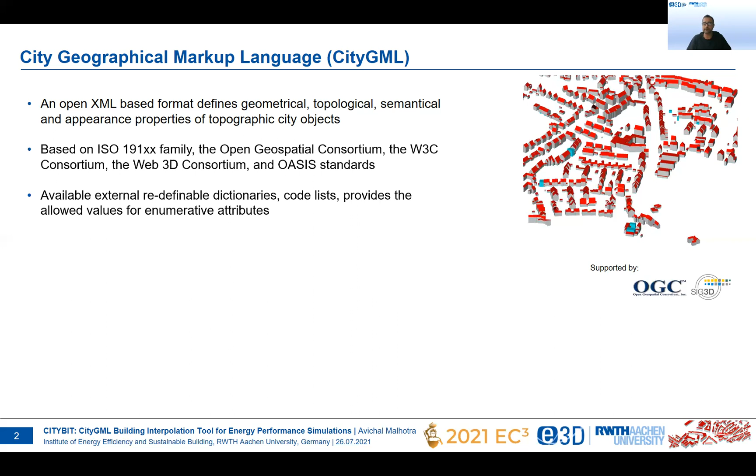There are many different available external redefinable dictionaries and code lists that provide the allowed values for different attributes. For example, the different roof types, or it could be the different building usages. These things can be defined in multiple code lists, depending upon the detailing.

Models can be defined over 5 levels of detail, starting from level of detail 0, where you just have the base model, level of detail 1, which is basically an extrusion of the LOD0 model, LOD2, where you have the different roof surfaces as well, level of detail 3, where you even have the window properties, as well as level of detail 4, which contains the city furniture as well as the other attributes of the different buildings.

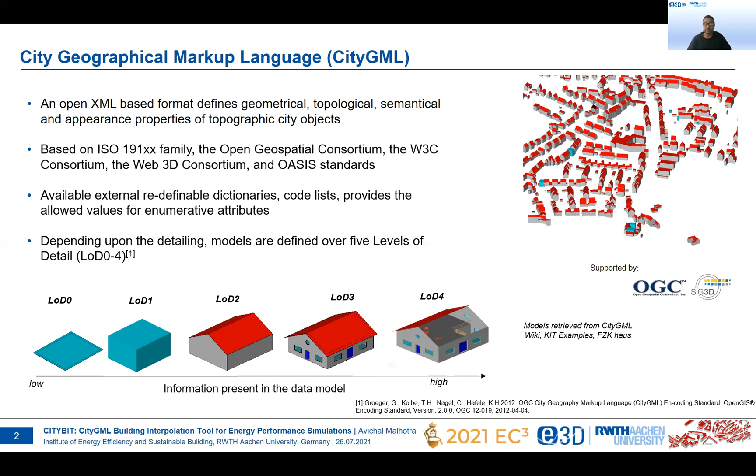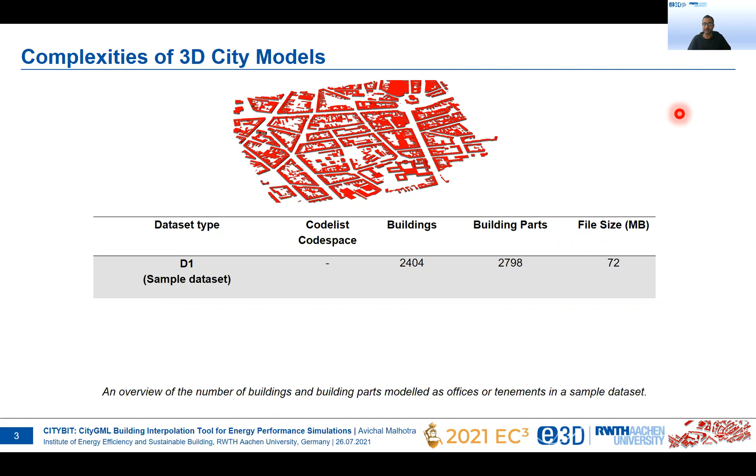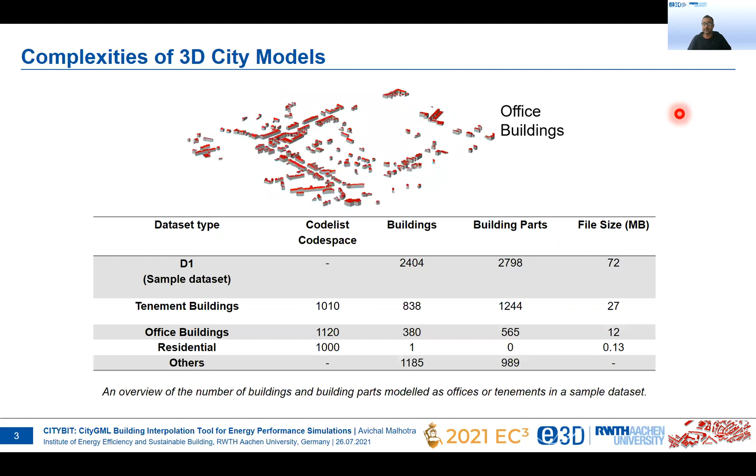As CityGML datasets are really complex, it's huge. So we try to sample out a small dataset which could be identified as a small city quarter, which we try to analyze and see how many buildings are there, how many building parts are there. So for example, in the dataset we selected, there were in total almost 2,400 buildings, as well as 2,700 building parts. But when we look closely, there are in total 838 buildings which are defined as tenement building, as well as 380 buildings, as well as one residential building.

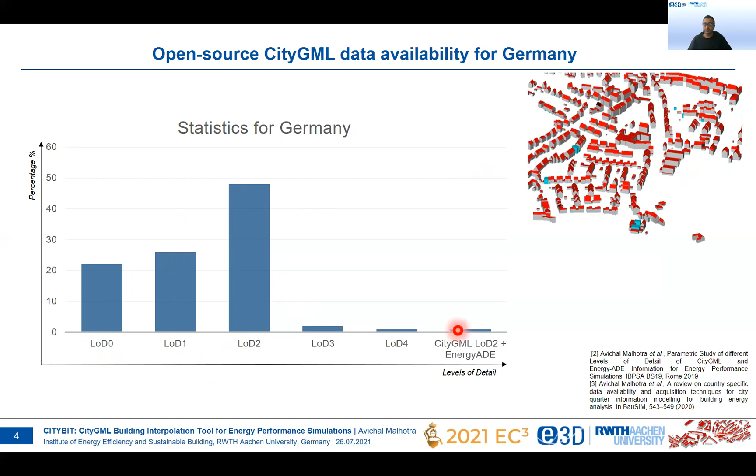If I just talk about Germany, because I take the data sets from Germany, almost 20% of the data models which are openly available are in level of detail 0, which is just the base model. Almost 30% or 25% are available in level of detail 1. But the most commonly available open source CityGML data model is in level of detail 2. And this is why we created the tool CityBIT, in order to develop new CityGML models in level of detail 2.

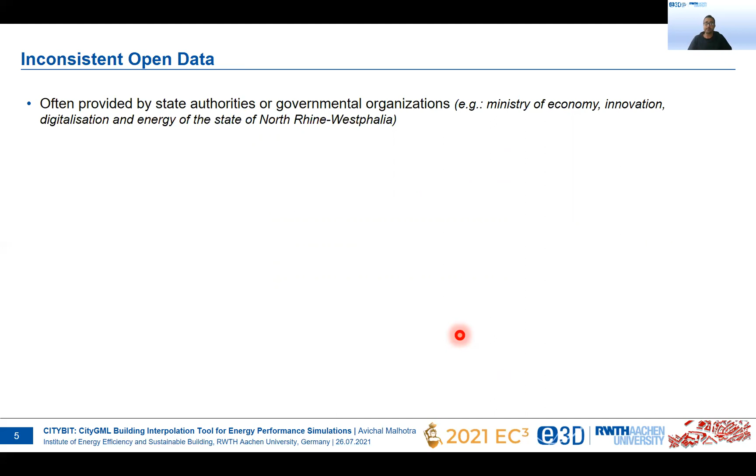There's again one problem we often face when we are talking about open data. Many times it's inconsistent. Often it is provided by state authorities or governmental organizations. The update schedules lead to multiple discrepancies between the models and the building. For example, if we look at the CityGML model from 2018, there's a building which is defined there. In 2019, the building is not even defined inside.

Yes, that's the true status of the building today. But if you compare to Google, the building is still there. If you compare to ESRI GIS visualization, it's not there, and in OpenStreetMap, it's still there. So there's a lot of confusion and a lot of different discrepancies that people find in open data sets. How do we overcome that? How do we overcome the problem of creating new building models when we want to simulate them?

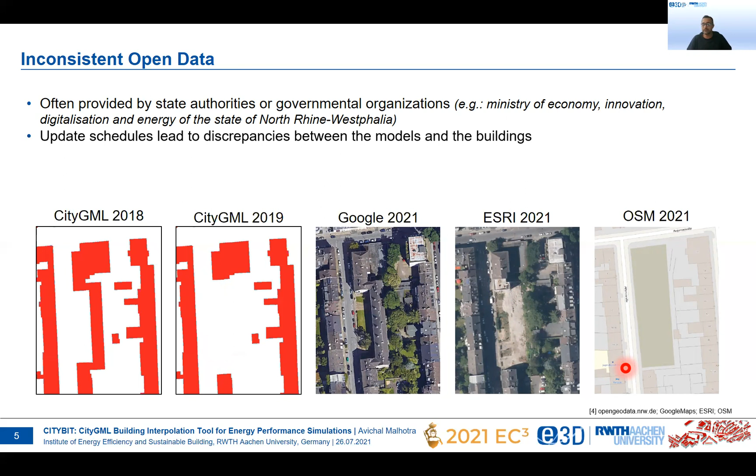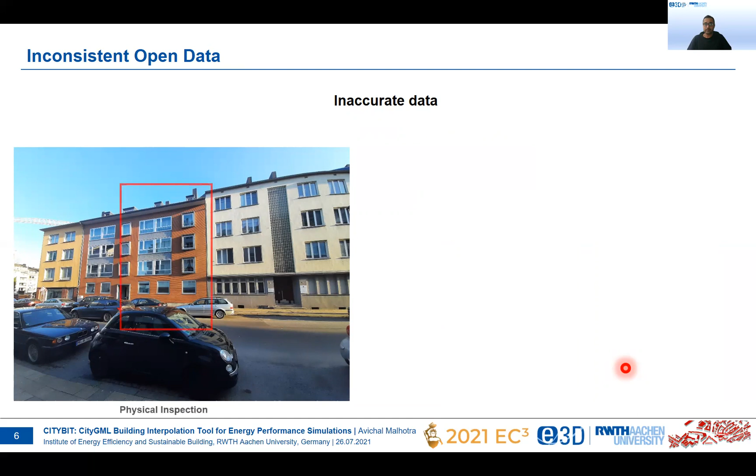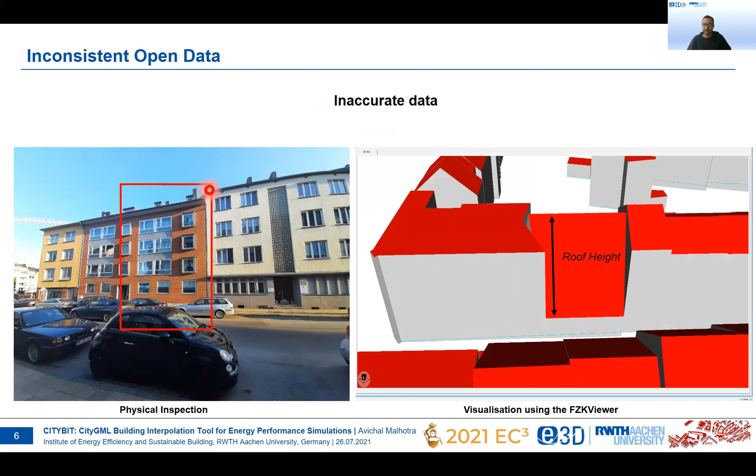Again, there's some data which is inconsistent in context of open data. We take an example building. To be very frank, it's near my house. So we physically went there, checked out the building, and compared it to the building model we have. So you see on the left figure, the physical appearance of the building seems to be fine, just like the other ones. But in the CityGML models, the roof is almost closer to the ground.

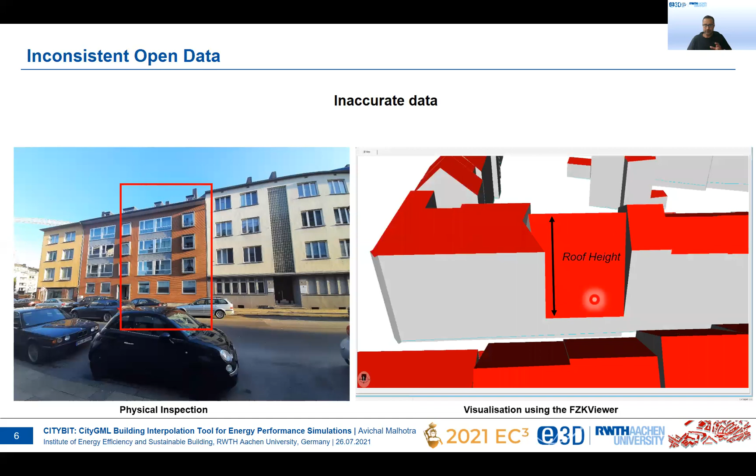To have a bigger picture, to look at a bigger data set, we analyzed the data set in Aachen. So in the data set, we see the different discrepancies between the different modeling years in context of number of buildings, number of building parts, the coordinate reference system, the level of detail, as well as the CityGML version.

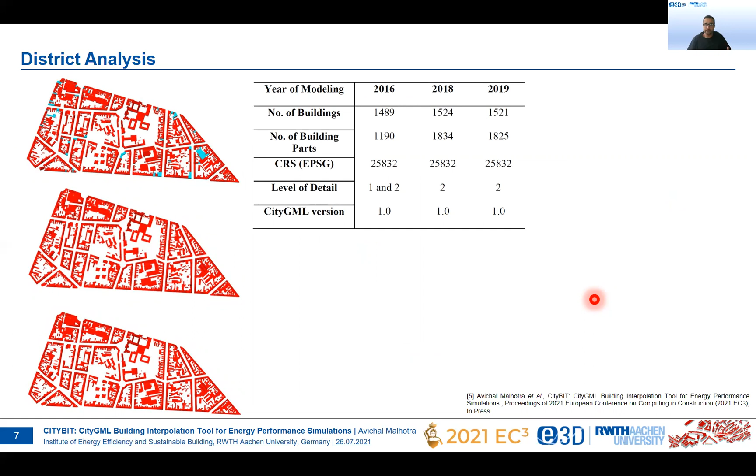One thing which is important in context of building models is the roof surface, because that is normally taken into account when you're calculating the volume of the building for energy simulations. So in this data set, almost 1500 buildings were with a flat roof, 939 buildings were defined as gabled roof, which is most common here. If I look at a bigger picture in the whole city, I would say flat roof and gabled roof are the most common roof types which are available.

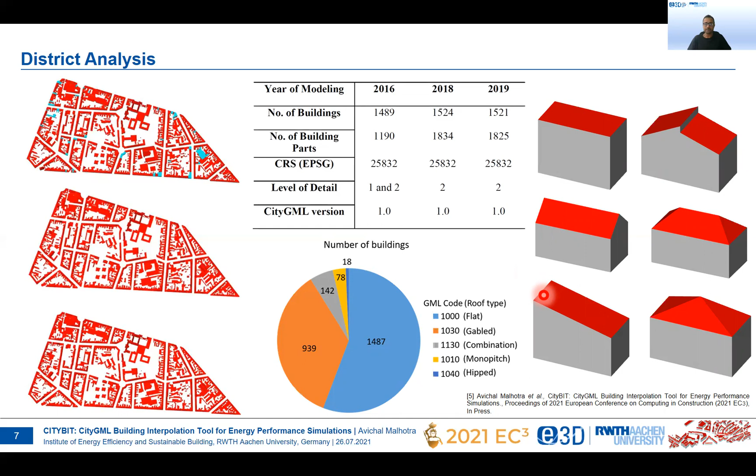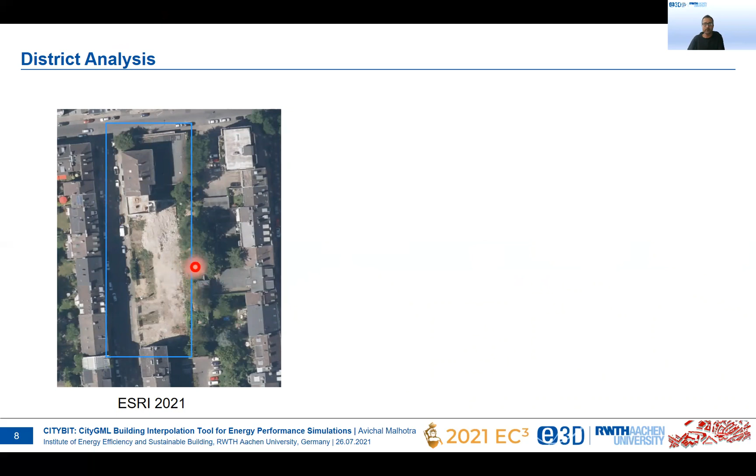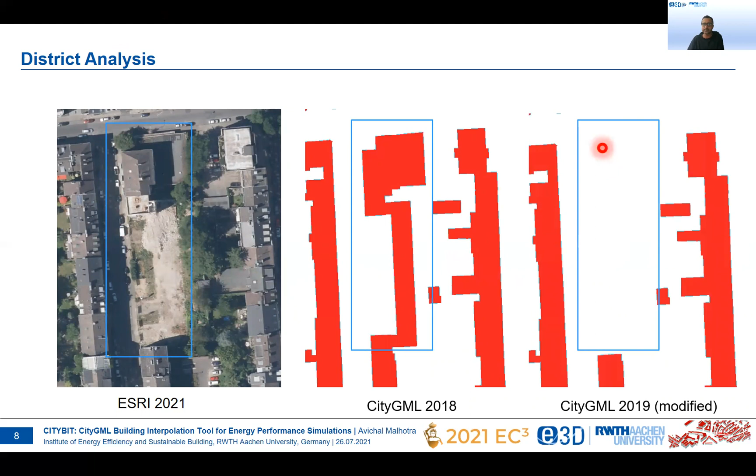Looking closer, we again selected the same example I showed you before, because we can physically inspect that place. We can go there and see how the actual land looked like. So we selected this particular part, which is highlighted in blue here. From 2018, as I previously mentioned, the CityGML model did contain the building there. From 2019, there was just a small part, but we modified it for a better building creation using the tool.

We even contacted the architects who are building this particular building block, and we were lucky enough to get the site plan. We tried to overlay it with the CityGML model in order to see how exactly we can create the models, so create enough of the basis.

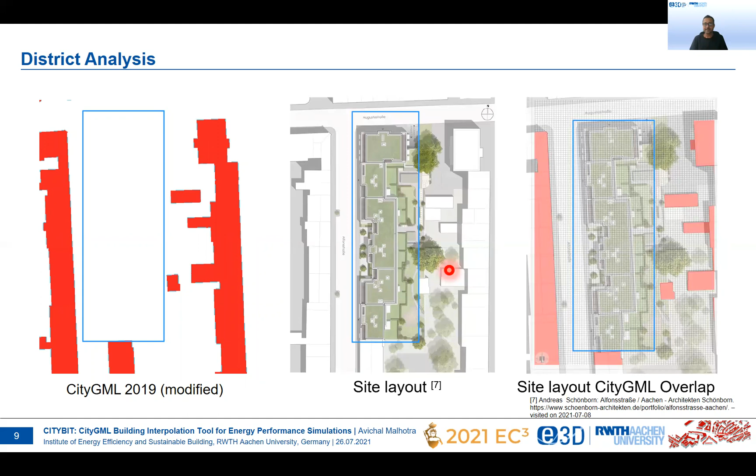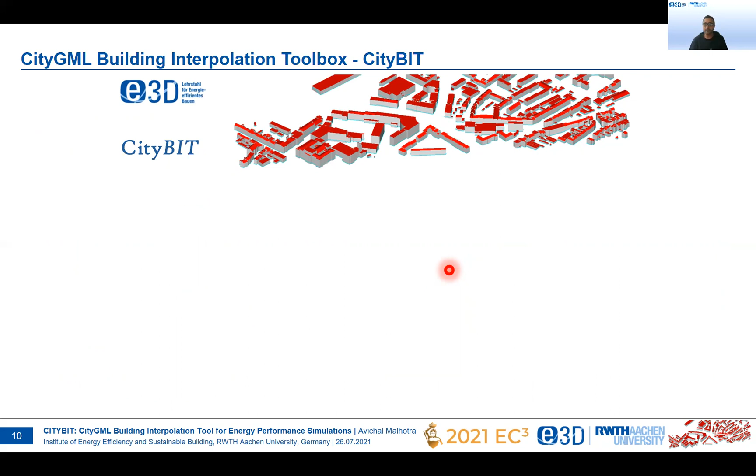Now I go to the tool. This is the main reason why we created the tool CityBIT, which is a CityGML Building Interpolation Tool. Now the question is, how can we create city building models? How can we create 3D models? How can we simulate them when even the data is not existing? So there are two ways to do it. One is to use manual inputs, which I'll be explaining in the next slides, as well as the interpolation methods. It could be done on the number of buildings, radius, polygon border. Again, I'll be explaining this in the next slides.

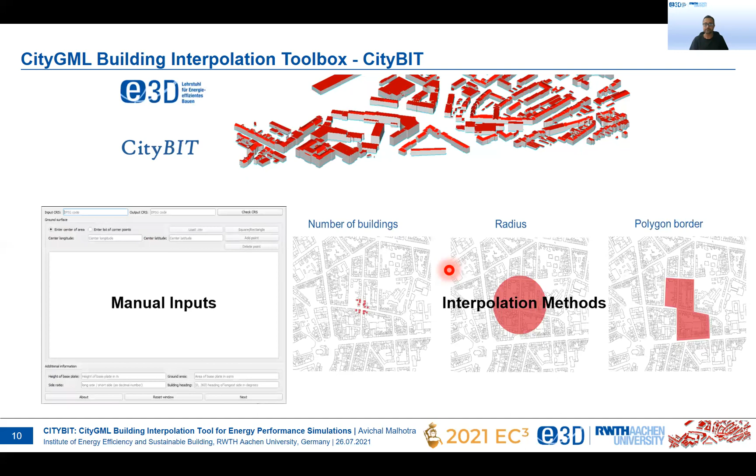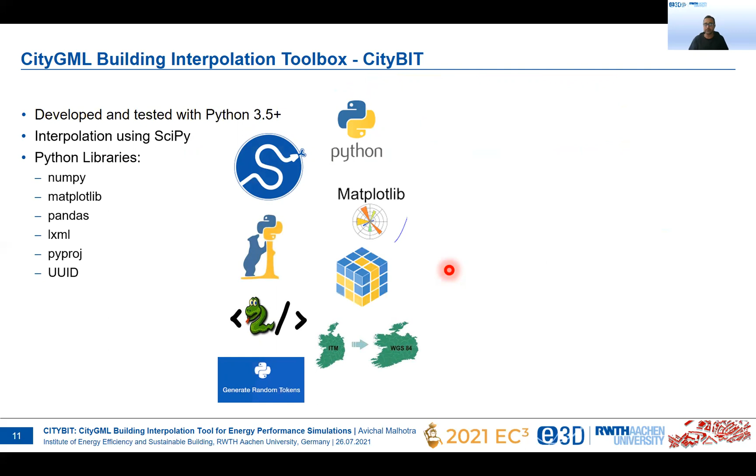CityBIT is developed and tested using Python 3. The interpolations which we use are using SciPy. The other libraries are, for example, NumPy, Matplotlib for plotting, Pandas, LXML, PyProj, which is again a library in Python which you can use to transfer the coordinate reference system from one zone to another, and UUID, which creates a new unique identifier for the individual buildings, and the main graphical user interface, which is easier for the user, using PySide2.

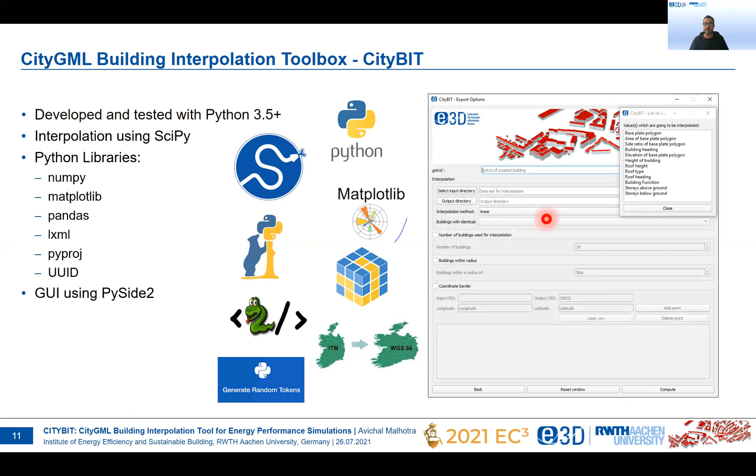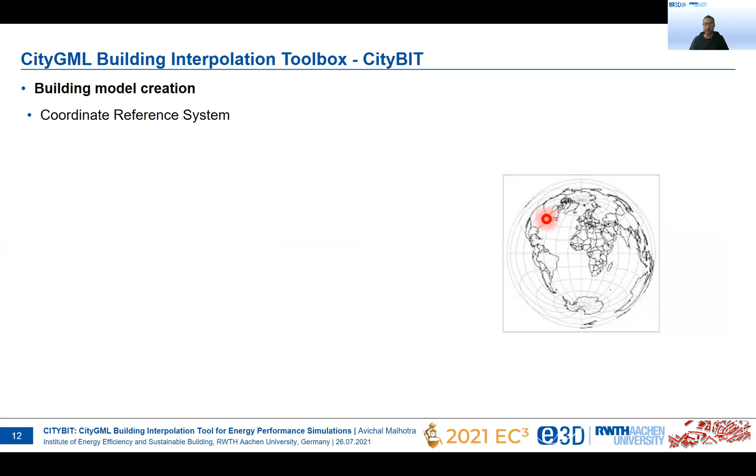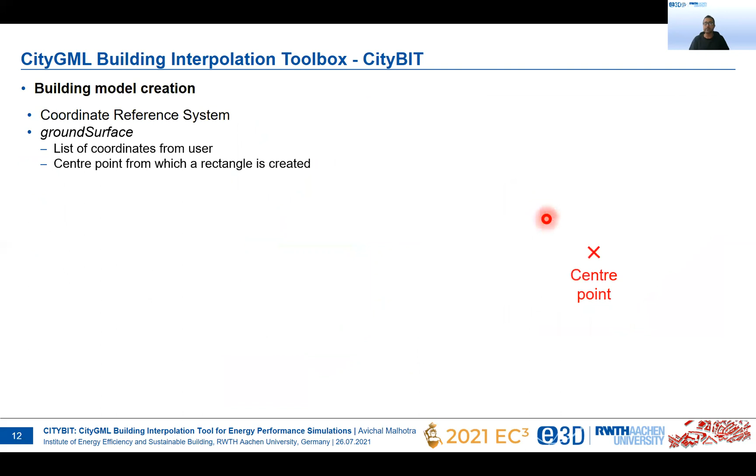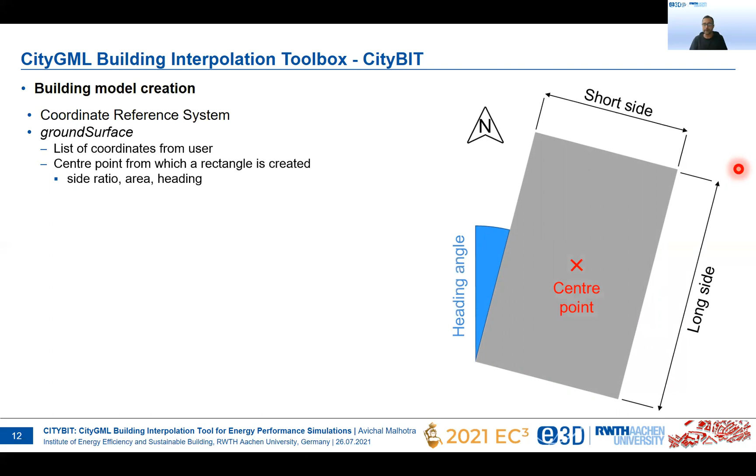So how do we do it? In CityBIT, the model creation takes a couple of inputs that the user needs to give. One is the coordinate reference system. Second is the ground surface. Either it could be the list of coordinates from the user or maybe a center point. If the user inputs only a center point, the side ratio, the area, and the building heading are asked of the user. Then the user needs to select which kind of roof type he or she needs in context of building up the model.

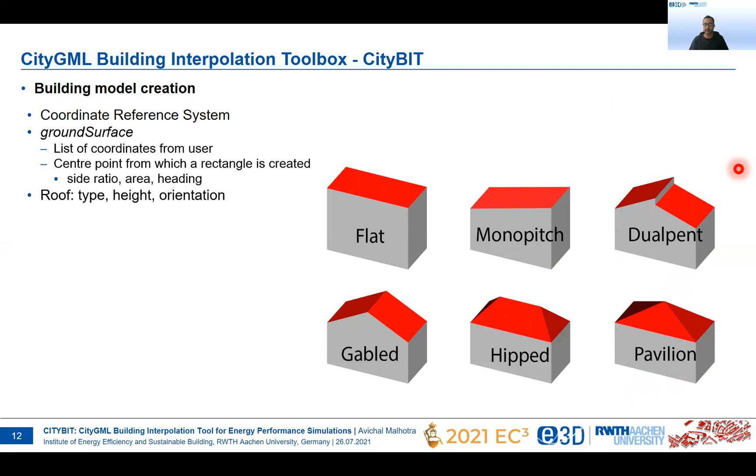The height of the roof, the orientation of the roof, these things are also included in CityBIT. Then comes the surface side, the terrain intersection, which is again important, building function, building height. All these parameters need to be added in the tool. Now, they could be added in the tool, or many of them could be interpolated as well. I'll explain it to you in the next slides.

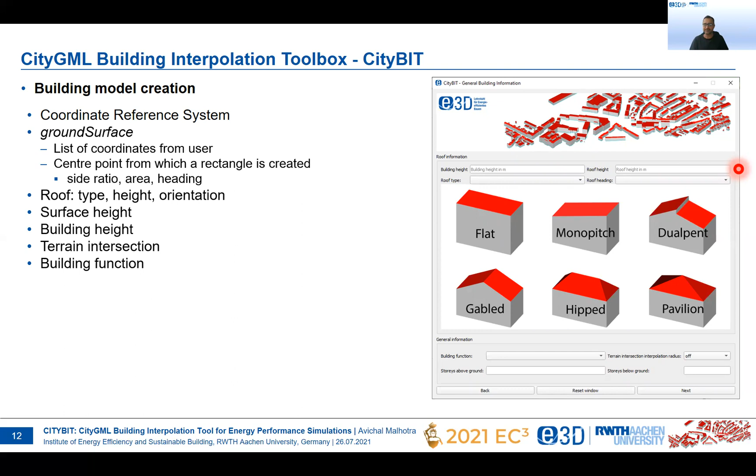So if I talk about CityBIT in context of manual inputs, we took the same example. We added the CRS 25832, which is common for Germany. The terrain height as 161 meters. This is some data we got from the architects. The stories below ground to be one basement. Stories above ground, it's a larger building, so 6 stories. Height of the stories 3 meters each. Building height to be 21 meters, and the roof type to be a flat roof. Using the tool, we were able to create the building models here. But this is only using manual inputs.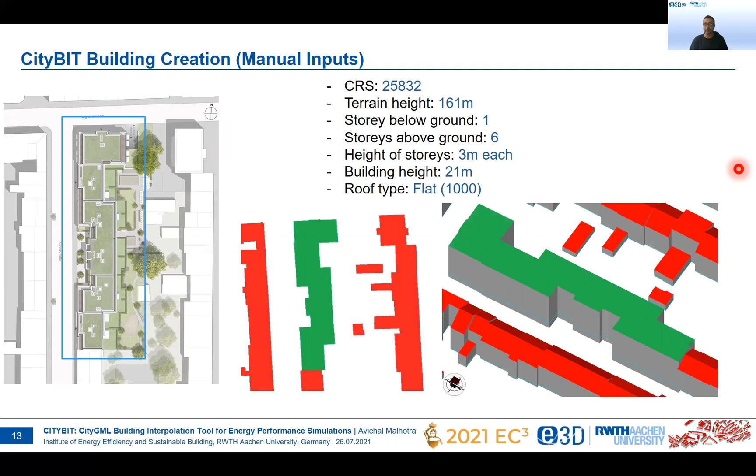Coming to the interpolation. So in the tool, we do the interpolation 3 ways. One, using linear interpolation, which is a method of curve fitting using multiple linear polynomials to construct new data points within the range of a discrete set of known data points. The second one, nearest neighbor methods, which is a method of multivariate interpolation in one or more dimensions by deriving estimates of the surface height at the vertices of a regular grid from irregularly spaced samples. Third, cubic interpolation, which is a method that offers true continuity between the segments and requires more than just the two endpoints of the segment, but also the 2 points on either side of them.

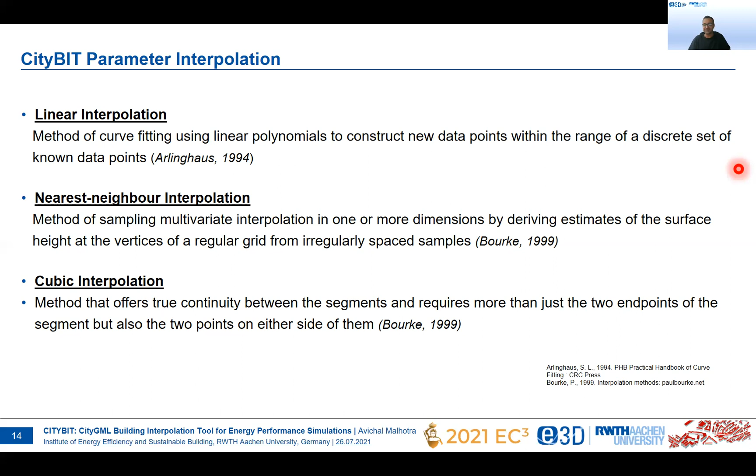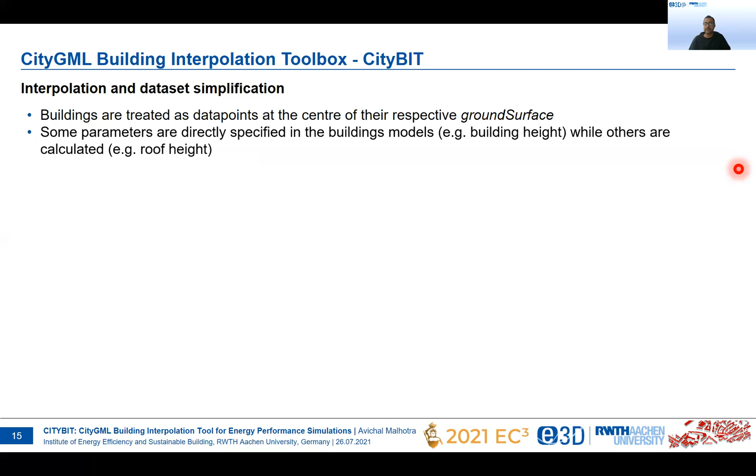Now, if I talk about CityBIT, the interpolation and the dataset simplification is quite important, at least for the surfaces where the shape is irregular or just creates a different kind of polygon. So in CityBIT, the buildings are treated as data points at the center of their respective ground surfaces. Some parameters are directly specified in the building models, for example, the building height, while the others can be calculated as well, based on the buildings which are surrounded.

The geometry of irregular polygons is simplified to their minimal bounding rectangles. For example, if we take a shape which is not a proper polygon or not a proper rectangle, the tool simplifies it into a minimal bounding rectangle, and the long side as well as the short side is calculated.

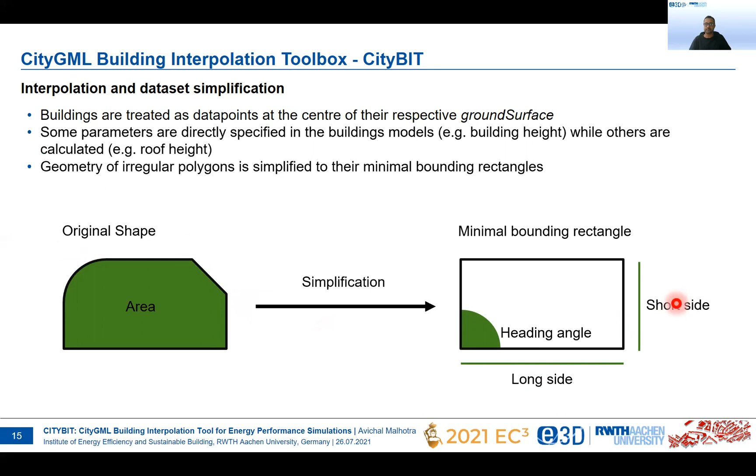To reduce the computation time, the datasets used in interpolation can be restricted or filtered. One, by only considering the buildings of the same roof types or building functions. For example, if you want to simulate a building or if you want to create a new city model with the same roof types, you can even do that using CityBIT.

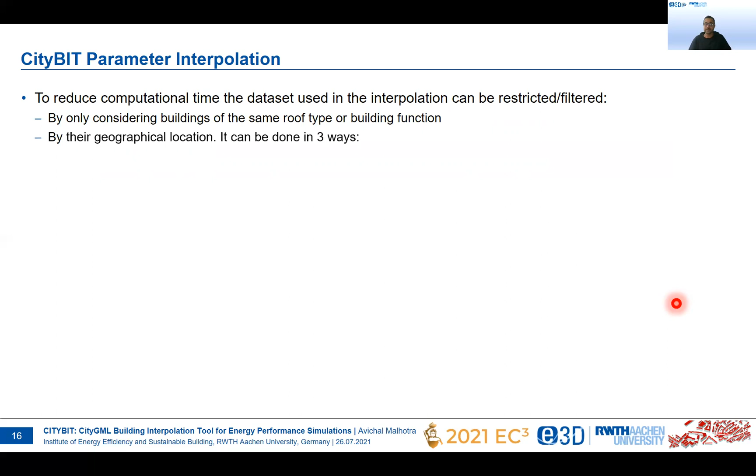The second is by their geographical location, and that could be done in three ways. One, with the number of buildings. If you select maybe 100 buildings to be interpolated, or one building to be interpolated from the neighboring 100, using the radius parameter or the polygon border. These things could be selected in CityBIT as well.

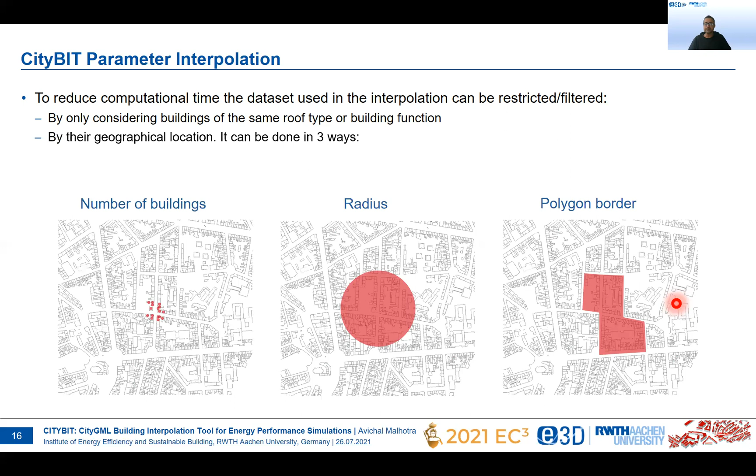So using the interpolation, we tried to create a new building. As an example, we took again a small section from the city of Aachen. With the CRS, we inputted the ground surface, the center point we have to provide, and the interpolation radius to be 100 meters. The values which were interpolated in the tool were terrain intersection, ground surface, building height, building function, roof type, stories below ground, stories above ground, as well as the roof type. Here, we were able to construct the building model within the whole data set.

If I compare the computational time for different data sizes, for example, if I take a radius of 100 meters, the time would be 147 seconds. And if it goes on to like 50,000 meters, it's not much, it's still 2137 seconds.

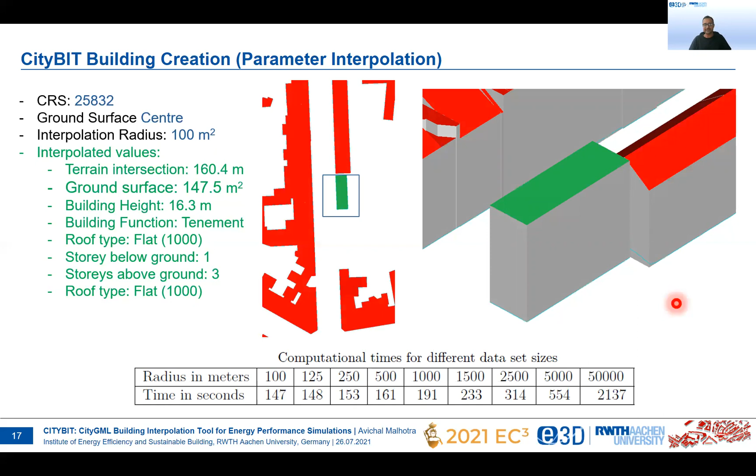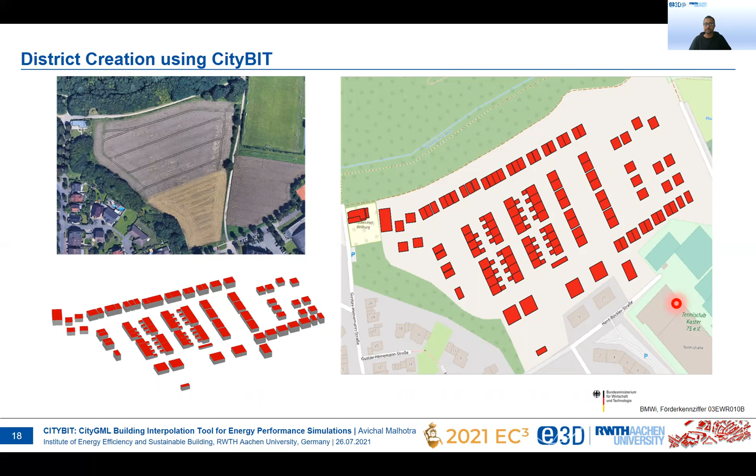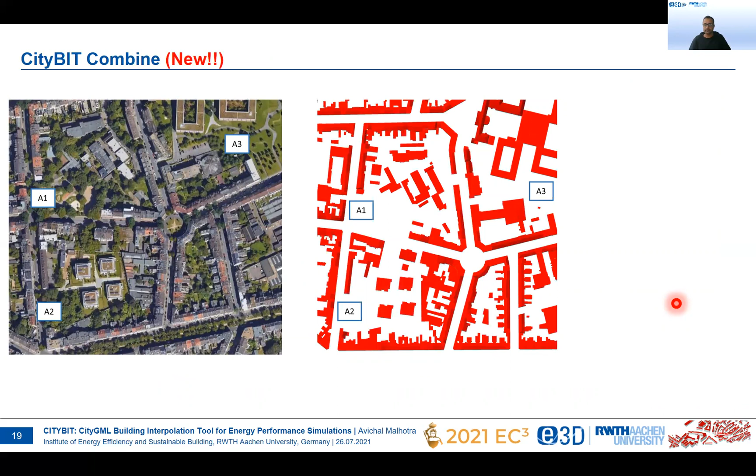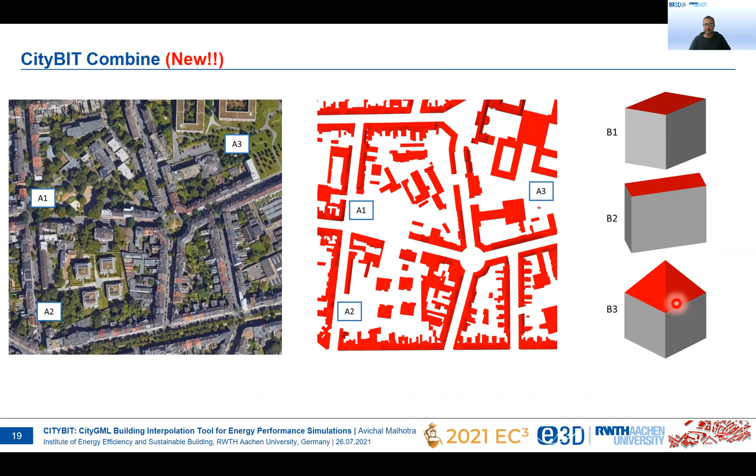There's a new functionality as well in CityBIT, which is to combine. For example, if you want to create new buildings in a city quarter or in a data set of a city quarter, this is the area. This is also an example given in the paper. And these are the three buildings which we would like to generate using CityBIT. So using the combine functionality, you can create plus combine the whole data set together into one.

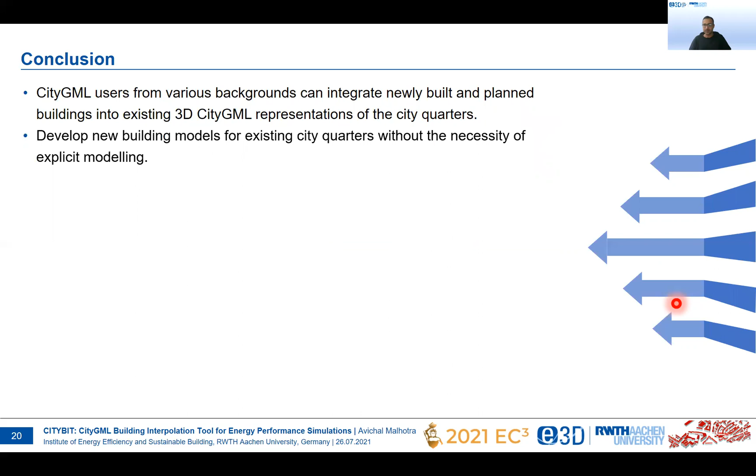With this, I would like to conclude my presentation: CityGML users from various backgrounds can integrate newly built and planned buildings into existing 3D CityGML representations of different city quarters, and develop new building models for existing city quarters without the necessity of explicit modeling, which is quite tricky. CityBIT exports LOD2 building models in CityGML version 2.0.

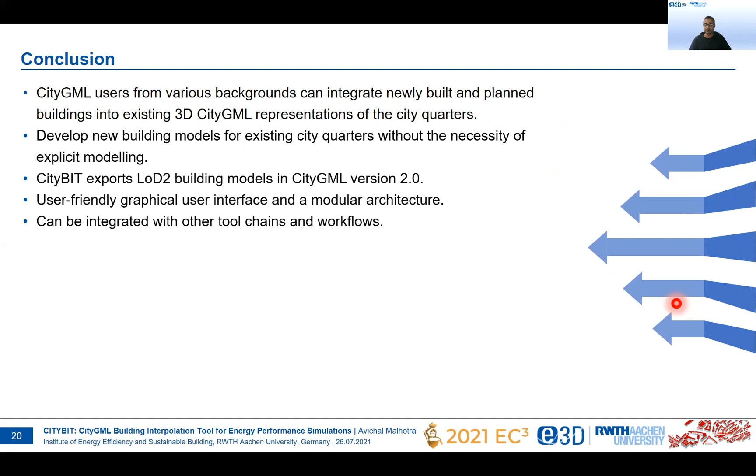There's a user-friendly graphical user interface and a modular structure of the toolbox. It can be integrated with other tool chains and workflows. Lastly, but most importantly, it's available as open source under the MIT license.

However, in future, we would like to compare the sensitivity of the various parameters, qualitatively analyze the interpolation techniques for the generated models, incorporate a visualization function of CityGML models into CityBIT, and integrate district level model creation as a single operation within the toolbox.